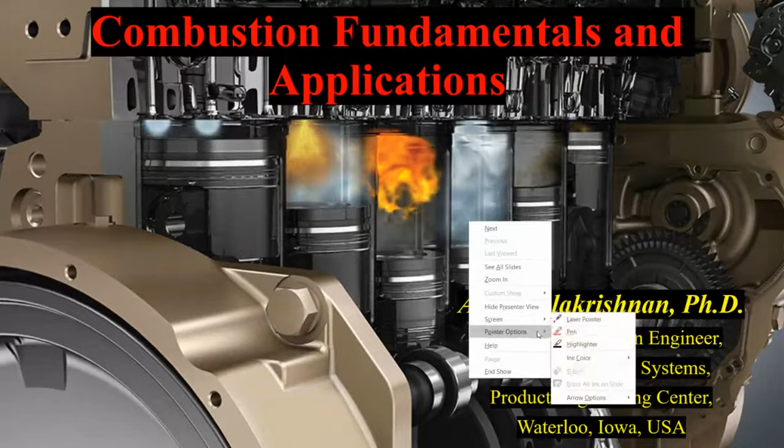So I'm going to talk primarily about what combustion is and its background, try to give you a perspective of its applications, and go a little bit into my PhD work on what I did in combustion. Just let me know if the internet disconnects or if you couldn't hear me through this presentation.

So this is our final year project. Dr. Singh was my thesis advisor there. It was a very amateur project, and that was the time when we were building our propulsion lab in Tagore Engineering College back in 2010. We started this as an amateur project, but then the way it got developed, we submitted our thesis to the 13th Asian Congress of Fluid Mechanics, and it got accepted.

With due respect to Dr. Dharmendra Singh Chand, I'm going to go through the presentation. I wanted to tell you all guys, whoever has the opportunity to work with Dr. Singh, you are very lucky. Now let me get into the topic for the day.

I'm going to talk briefly on what combustion means. I don't know if you guys have taken a course on this or are about to take it, but this is going to be a broad overview of what combustion is. I may not be able to cover everything, but I'll try to put in as much information as possible that I can cover within this 45 minute duration.

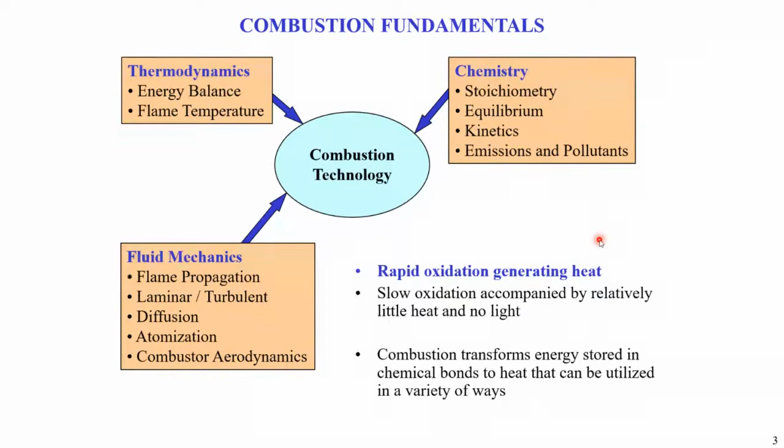In either case, combustion is basically a chemical reaction that transforms the energy stored in the chemical bonds to heat, in a variety of ways. So basically we harness the energy stored in the chemical bonds of any fuel by oxidizing it. The hydrogen and carbon are bonded by chemical bonds, so by breaking the bonds through oxidation, we are harnessing the chemical energy out of it. That's the basic definition of combustion.

I don't want to bore you guys with a lot of equations, but we need to go through this to get an idea of what I'm going to talk about in the later part of this presentation. Probably you would have learned in school or somewhere in chemistry class about stoichiometry. If you've never heard of stoichiometry, here's the definition: stoichiometry of hydrocarbon air combustion.

Stoichiometry is nothing but the exact amount of oxidizer that you need to burn a fuel. In this case, the oxidizer is air, but you can write the equation for just oxygen. This is the stoichiometric equation for a hydrocarbon fuel where X and Y stand for the number of carbon and hydrogen atoms. O2 plus 3.76 N2 is the chemical composition of air. When air is burnt with a hydrocarbon fuel, the first product of combustion is carbon dioxide, then water, and then nitrogen, because nitrogen is inert and doesn't react with anything. So in hydrocarbon air combustion, the primary products are carbon dioxide and water.

AF stoichiometry is nothing but air to fuel ratio stoichiometry. To burn a given amount of fuel, exactly how much air do you need? That is calculated using this formula. 4.76 is the molar basis, multiplied by the molecular weight of air over the molecular weight of fuel. I've put in an example calculation.

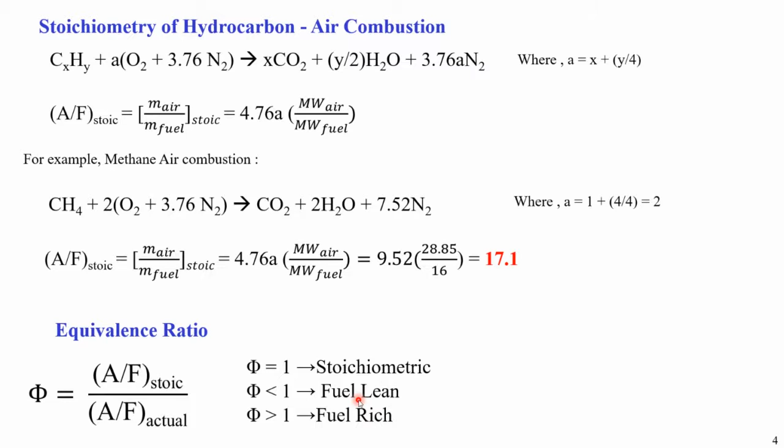So when we say fuel lean combustion, is there any practical application, or what does fuel lean combustion mean? We can say that diesel engine combustion is primarily a fuel lean combustion. A fuel rich combustion is somewhere where you have more fuel than the oxidizer present in the combustion system.

I'll try to keep this more interesting by not giving more equations, but trying to explain what this concept is. There is something called flammability limits when you talk about combustion. Whenever there is combustion of fuel, or whenever fuel is burning, there are certain favorable conditions required for it to combust properly.

In this left graph, you can see that the red color is the hydrocarbon. This is basically the relative percentage of hydrocarbon and air. Hydrocarbon is nothing but fuel. So we can see that every fuel requires a certain ratio of fuel and air in the combustion system for it to sustain a flame.

If the fuel is lower than the required range, it's going to extinguish. This is called the lower flammability limit, meaning the system doesn't have enough fuel for the given amount of air to combust properly. The same way, if the system has too much fuel and too little air beyond the flammability limit, this is called the upper flammability limit of the fuel.

I've given a few examples here. For diesel fuel, these percentages are a percentage by volume. If you have 100 liters of air, between 0.6 liter and 5.5 liters of fuel you can burn in that system. This is typically where diesel engine combustion takes place. The same way, for gasoline, between 1% and 7.6% of fuel. For methane, 5.3 to 15%, and for hydrogen it's a wider range, 4% to 75%.

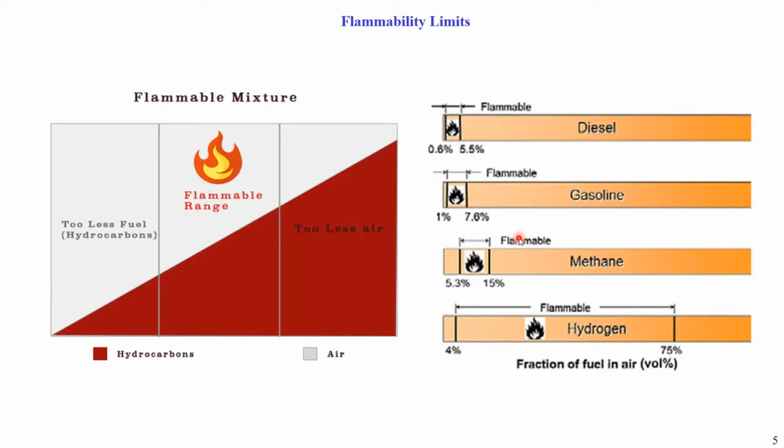This is something my advisor taught me in grad school - how to represent the whole combustion phenomena into a single mathematical equation. Probably some of you may have seen this equation. This is the classical Arrhenius equation. Probably you would have learned it in your chemistry class.

But when we learned this equation in chemistry class, we would have thought only about the rate of reaction. But in terms of combustion, we can see that the left hand side is basically determining the rate of reaction - meaning the rate of how the flame propagates in a combustion system. It is directly proportional to the molar concentration of the fuel, so how the fuel gets consumed. The more the concentration of fuel, the higher the rate of reaction will be.

This is called the frequency factor. This frequency factor is basically based on collision energy. Like when you read the definition of temperature, you know that temperature is basically a matter of randomness and the collision energy present in the system. So this parameter determines that collision in the system, and it's a function of pressure. With higher pressure, this number is going to go up.

And then Ea is the activation energy, R is the universal gas constant, and T is the temperature - and this is an exponential function. So for initiating a chemical reaction, you need a lot of activation energy because it's on the exponential side. You need to provide a lot of activation energy and temperature to initiate this reaction, and with higher fuel concentration and more pressure, you are going to burn the fuel.

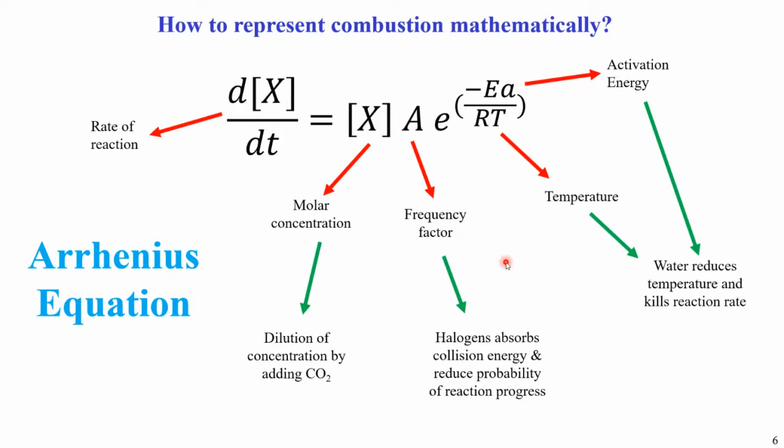This is what amazed me when I started learning about combustion, so I thought I would put that here.

Now we will go on to different combustion modes and flame types. I think I'm getting really slow here.

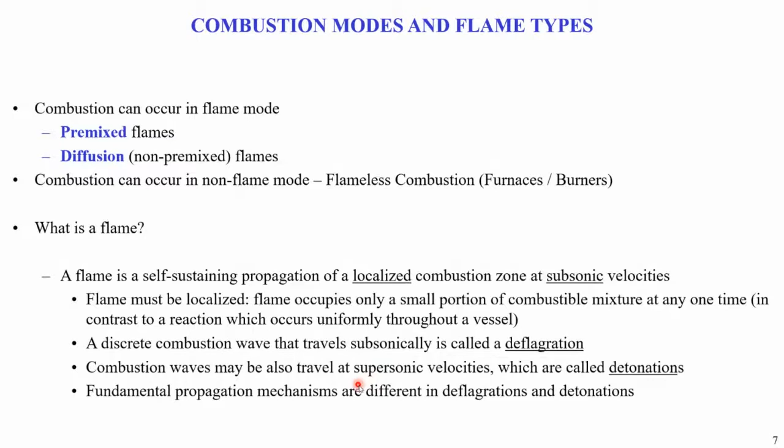Now I'm going to talk about the laminar premixed flame. Flames can be categorized into two types: premixed and non-premixed, with non-premixed also called diffusion. Similarly, they can be categorized as laminar and turbulent, similar to our fluid mechanics definitions. A laminar flame is one where the streamlines do not cross each other and it does not change with respect to time, whereas turbulent flames are complex, chaotic flames that follow all the definitions of turbulent flow.

So here we are going to talk about a laminar premixed flame. What does premixed stand for?

Premixed stands for the fuel and oxidizer, which is air or oxygen, mixed at the molecular level prior to the occurrence of the chemical reaction. So before the fuel and oxidizer meet at the combustion flame front, they mix with each other. So when it reaches the combustion flame front, they're already mixed.

So here you can see from this tube, this is called a Bunsen burner. I hope you've seen this before, it's in all the chemistry labs, where the premixed fuel... This is the diagrammatic representation of the Bunsen burner. The premixed fuel and air goes from here, and this is the premixed flame front, where when it reaches the flame front, the fuel and air is already mixed.

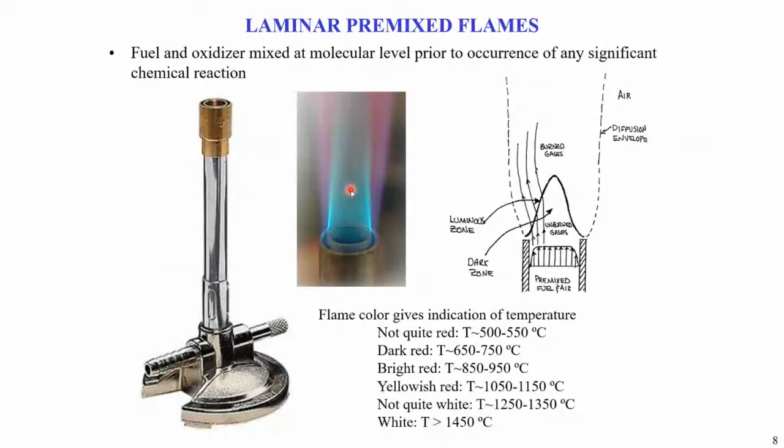With the flame color, we have different types. The flame color suggests different flame temperatures at each location. Red is the lowest, and when you see a white region of the flame, that's where the highest temperature is. Here's another laboratory picture showing the laminar premixed flame.

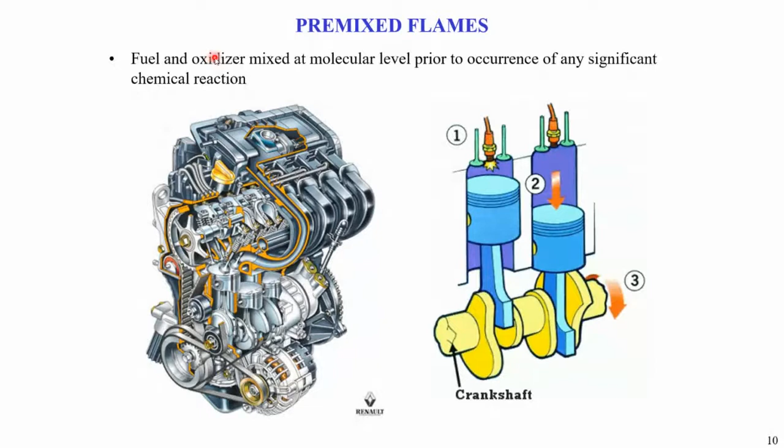So in reality, or in actual application, where do we have premixed flame? Think about our gasoline or petrol engine, like in your car, scooter, or motorbike, where you have a carburetor or fuel mixer. That's an example of premixed flame, because when it gets injected into your cylinder through the carburetor, the fuel and oxidizer have already been mixed there. So this is one example of premixed flame.

Here I'm going to talk about the application of flame mode and non-flame auto-ignition mode. In a spark ignition engine, when you have your charge injected and the spark is ignited, it starts a flame, and the flame propagates through the cylinder, pushing the piston down. This is how you normally combust fuel in a spark ignition engine.

But there's a special phenomenon called engine knock. Engine knock is basically a rattling sound you hear in one or more cylinders. It's because of a premature tendency to ignite. So before the spark could ignite the fuel, because of the high temperature and pressure present in the cylinder, the fuel auto-ignites itself.

That's when you've probably heard the term octane number. The octane number relates to branched fuel. Whenever you have a highly branched compound, it burns smoothly, so you'll have little knock. Heptane is unbranched, and that pretty much deals with knocking badly. So this is basically octane number of 0 and octane number of 100. When you go to the gas station, you'll see an octane number presented for the fuel. The higher the octane number, the lower the knock.

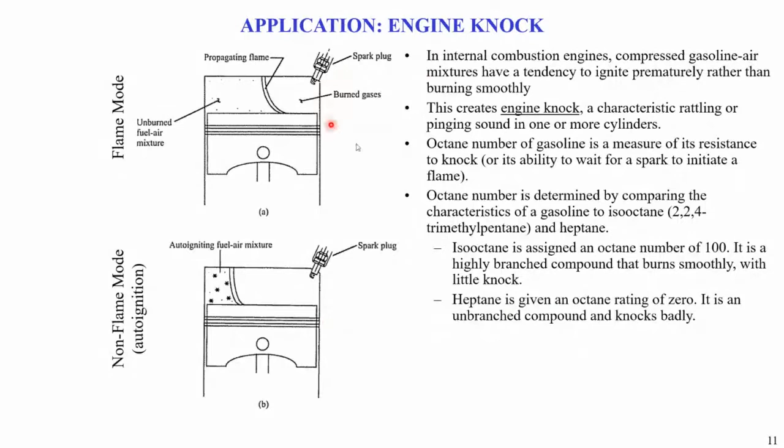So then let's go to the diffusion flame. This is the classical example of a diffusion flame, the candle flame. Here the reactants, the fuel and the oxidizer, are both separate until they meet at the combustion flame front. In a candle flame, when you burn the candle, the wax gets vaporized, and that vapor meets with the oxidizer present in the air at the combustion flame front.

So this is how the diffusion flame occurs. Here you can see in the burner, the fuel alone is coming, and the air comes from the atmosphere, meeting at the flame front. These are the different flame fronts of the combustion flame, and here you can see a full range of equivalence ratio throughout the flame. I defined this equivalence ratio where a ratio greater than 1 is a fuel-rich flame, and less than 1 is a fuel-lean flame. Whereas in a diffusion flame, the equivalence ratio is typically infinite, because the denominator goes to 0 for a diffusion flame. So this is the classical diffusion flame example.

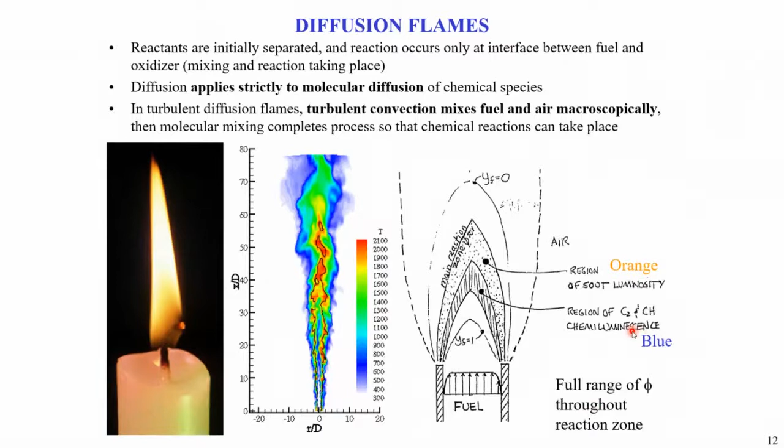So this is just for some curiosity. When you have a diffusion flame on Earth, like a candle flame, it's pretty much going to look like this. But if you have it in space, it's going to look like this - it's called microgravity combustion. Why does this happen? Because of the gravitational force present on Earth. The gravity is pulling down the flame, and because of the buoyancy effect of the gravitational pull, your flame always tends to go up. This is the reason even if you hold your candle flat or pointing downward, your flame always points up. The reason is the presence of gravitational force and the gravitational pull.

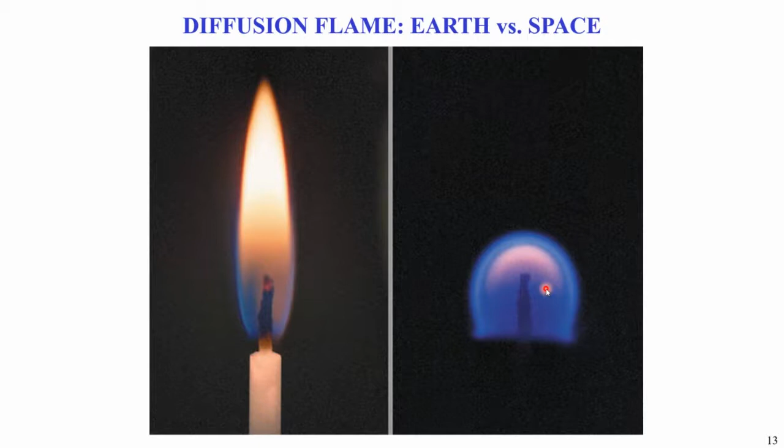The buoyancy is basically the occurrence of the gravitational force. Whereas in space, that doesn't occur. Even though it's still pointing upwards, because there is microgravity present in space, it won't extend like this.

So an example of diffusion flame: I talked about the premixed flame, and the real-time example for that is a gasoline engine. The same way, for a diffusion flame, the classical real-time example is a diesel engine combustion. I hope you all know the difference between a spark ignition engine and a compression ignition engine.

In a spark ignition engine, you inject the charge, which is the fuel-air mixture, which is then combusted by introducing a spark through the spark plug. Whereas in a diesel engine combustion, you do not have a spark plug because you induce combustion by pressurizing the fuel beyond its auto-ignition temperature. So when it reaches the ignition temperature, the fuel combusts by itself because of the compression. That's the reason diesel engines have a higher compression ratio.

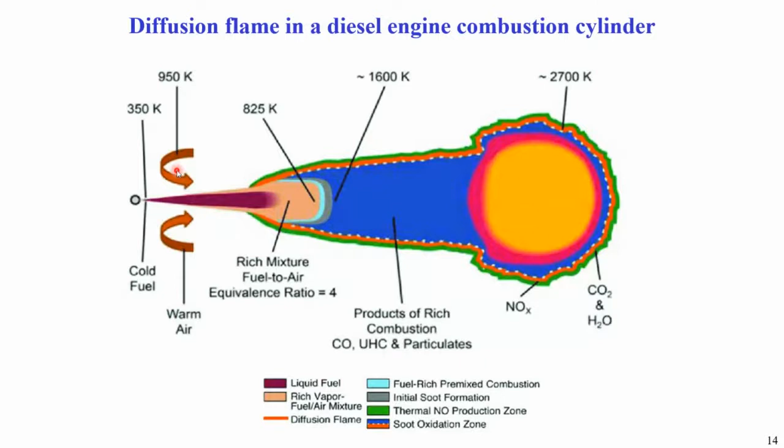So in this case, when the fuel is injected into the cylinder, because of compression you have hot air, and the mixing of those occurs here. So this is the classical diffusion flame. But the cylinder is completely filled with air, so as it propagates into the air, it forms different regions of flame: rich combustion and then lean combustion. These are the different zones present in a diesel flame. This is the theoretical schematic diagram of how a diesel engine flame looks like.

Now let's go back to our Bunsen burner example. Here you can see this blue line, the blue flame, is the premix flame, because the fuel and air is coming through the tube, since it's premixed, right? This is the premix flame where the fuel and air is already mixed before entering the combustion zone.

Whereas you also see a secondary flame, like you can see there are two flames that are encompassed each other. There is a secondary flame. This is a diffusion flame.

The reason for this is when the fuel and air comes through, part of the fuel gets oxidized here, and then because of the velocity, some fuel escapes the premixed flame zone and tries to go to the atmosphere. That's when the air entering from the atmosphere tries to burn that fuel, and because of that you will have fuel coming from this end and air coming from this end, and they meet at the combustion flame front, which is the definition of a diffusion flame. So in a Bunsen burner, we actually have both a premixed flame and a diffusion flame.

Now let's try to answer a few questions. What determines the shape of this flame? The answer is the velocity.

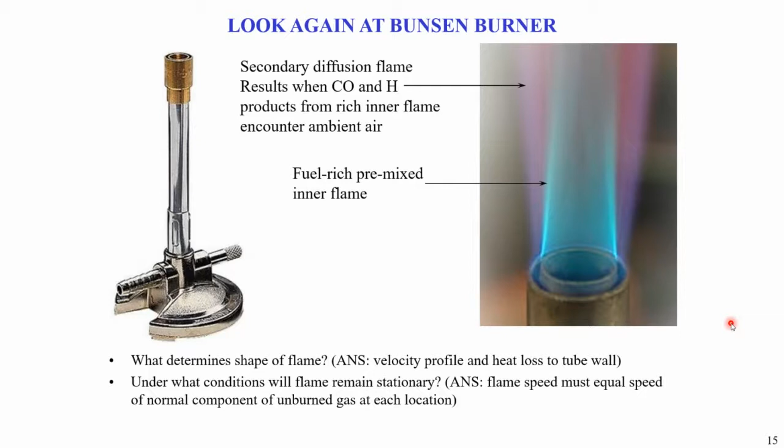I'm going to explain this through a video, but the flame on this burner can only be sustained if the unburned reactant velocity coming through the tube is balanced by the burning velocity of the flame. If that doesn't occur, there will be two other conditions, called flame blow-off versus flashback.

So when we have a stable flame, it means the incoming velocity from the burner tube equals the burning velocity. This flame is going to sit on this burner and burn as long as the fuel, or fuel-air mixture, is coming.

Whereas blow-off occurs when the reactant velocity is higher than the burning velocity. The burning velocity is a tangential component that acts like this, whereas the incoming velocity comes like this. So when the reactant velocity is higher than the burning velocity, it blows off the flame. The flame just goes off.

Whereas there is another thing called flashback. When the burning velocity is higher than the incoming velocity, the flame tries to get inside the burner. Now let me play this video and show that.

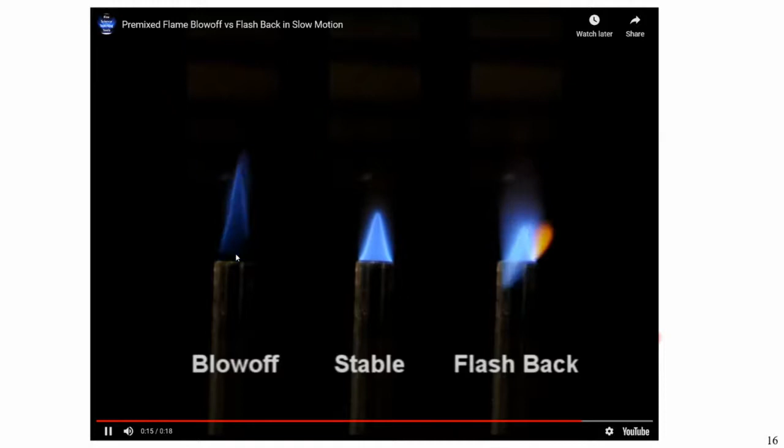Okay, that was quick. Now we're going to see the slow motion, where we can look at the blow off. You can see how the flame goes up, right? The same way, when we look at the flashback, the flame goes back.

Both of these are undesirable conditions, because let's talk in application. We don't want blow off to occur anytime during a combustor's operation. Take an aircraft engine, we don't want the flame to blow off when the engine is running mid-air. The same way, in any combustion application, we don't want the flame to go off, because when the flame goes off, the fuel is still being injected out, and that creates a hazardous condition.

The flashback is another condition where we don't want the flame to go back and burn the fuel inside, because the fuel is coming out of the fuel tank, and we don't want the flame to travel back into the fuel tank. That is the reason we choose a fuel that has a favorable flammability limit for that particular application.

To prevent flashback, we have something called a flame arrestor. The flame arrestor is nothing but a wire mesh that we put somewhere upstream of the burner. When the flame tries to cross that, it basically quenches the flame. When I say quench, it means it brings down the temperature of the flame so that it can no longer sustain itself. So these are some critical concepts of different types of flame.

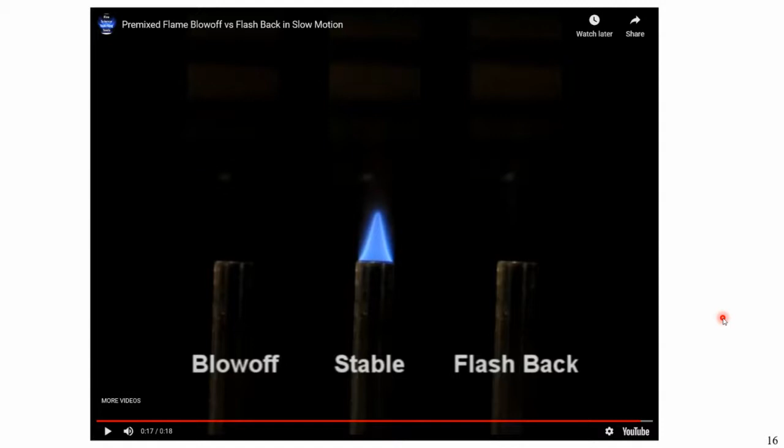Okay, now let's get into something called emissions and pollutants.

This is where all the combustion engineers and propulsion system designers work on, because we need to be emission compliant to get our products approved from these emission regulations.

For India, it is called Bharat Stage. We have different stages of combustion regulation that we need to meet to sell the products. For the US, it's called FAA regulation or EPA regulation, with something called tier 3, tier 4, and so on. For the European Union, it's called EU regulation. So every country has its own regulation. For India, it's called Bharat Stage.

We are currently running on Bharat Stage 4, and probably in the news you would have heard about Bharat Stage 6 vehicles, stage 5 vehicles. Each of those stages represents more stringent regulations for each of these pollutants, pretty much unburned hydrocarbon, nitrogen oxides, carbon monoxide, sulfur oxides, and so on. So we have stringent emission regulations that we need to follow to protect the environment.

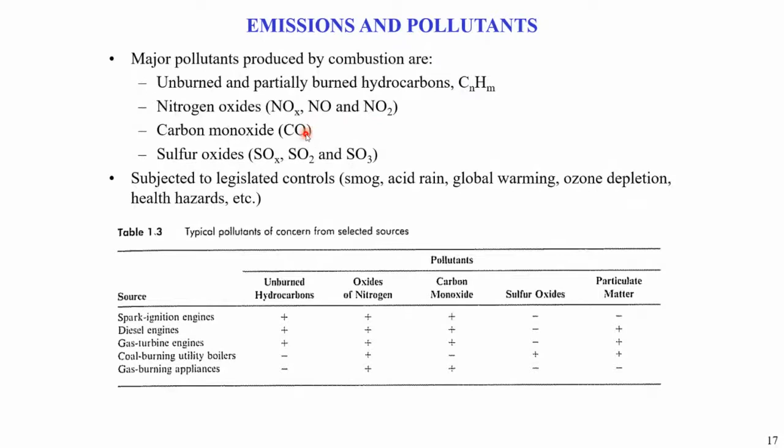My entire PhD work, and even a huge portion of my current job role, focuses on nitric oxide pollution. In my PhD work, I dedicated my time to understanding how nitric oxide is emitted or produced in a combustion environment. In my current role, I develop after-treatment catalysts and also try to calibrate the engine so it produces a reasonable amount of NOx that we can regulate through after-treatment systems.

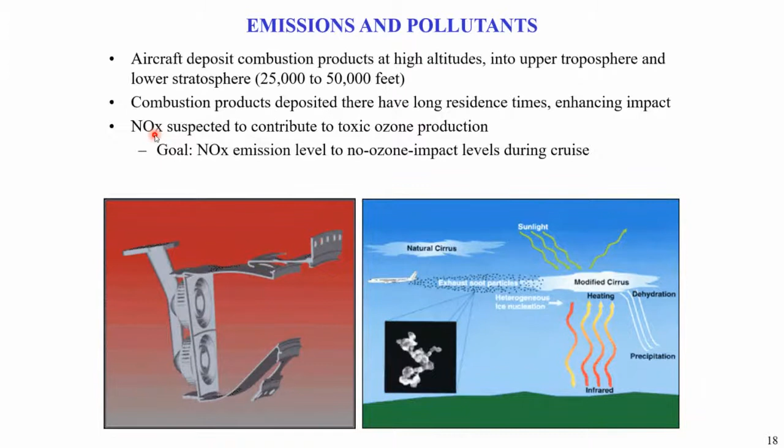With that background of combustion, I'm going to talk a little bit about my PhD topic. At the University of Oklahoma Combustion Lab, we do combustion research on biofuel, not only diesel and jet fuel combustion. We also did biofuel combustion research, trying to find vegetable-based fuels like canola oil, soybean oil, and then use those as biodiesel based on an esterification process, called transesterification.

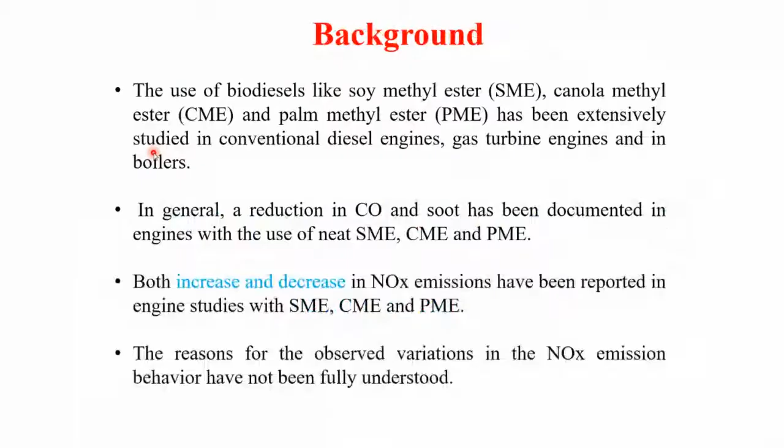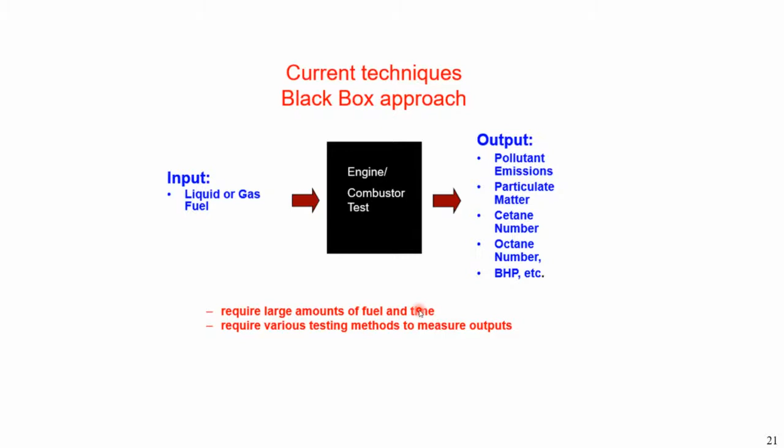Since I'm reaching the time limit, I'll just give a gist of my research. In every engine research work, they put the fuel in, test the engine, and measure all the pollutants out. We developed a system where we don't want to burn a lot of fuel, because in testing development, developing fuel is very expensive. So we want to use little time and little testing, and reduce the number of tests needed to characterize the combustion.

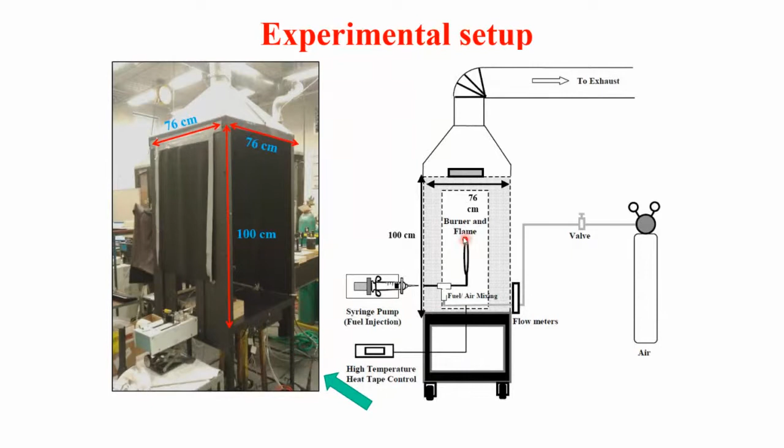So for that, we developed this combustion system where we pre-vaporize the fuel and inject it through the system to burn a premixed flame. By pre-vaporizing the fuel, we remove fluid mechanics parameters like atomization and spray evaporization, so that we can only study the contribution of chemistry to the pollutant formation.

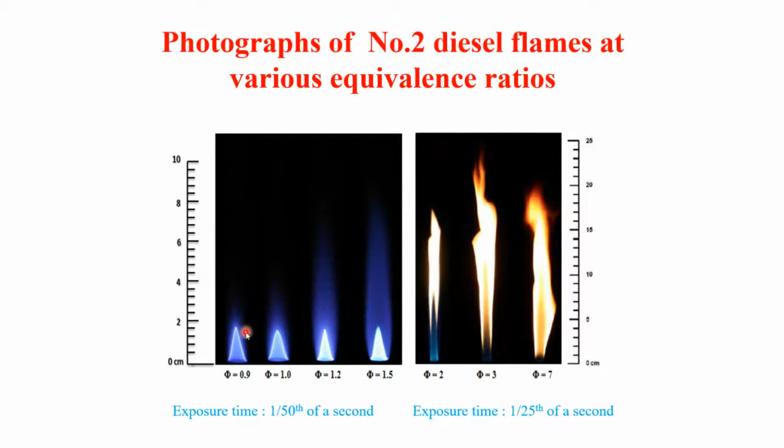I'm going to just skim through the slides. This is a diesel fuel flame under different equivalence ratios, and this is a palm methyl ester flame under different equivalence ratios, where you can see at fuel-rich conditions it's still burning blue flame, which is good because it's emitting less soot.

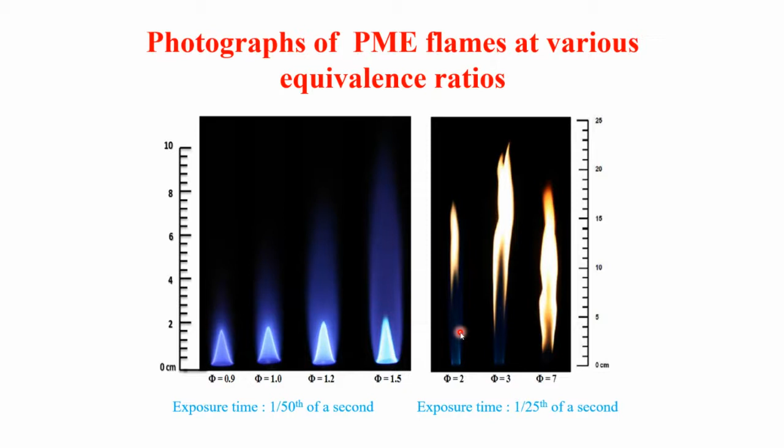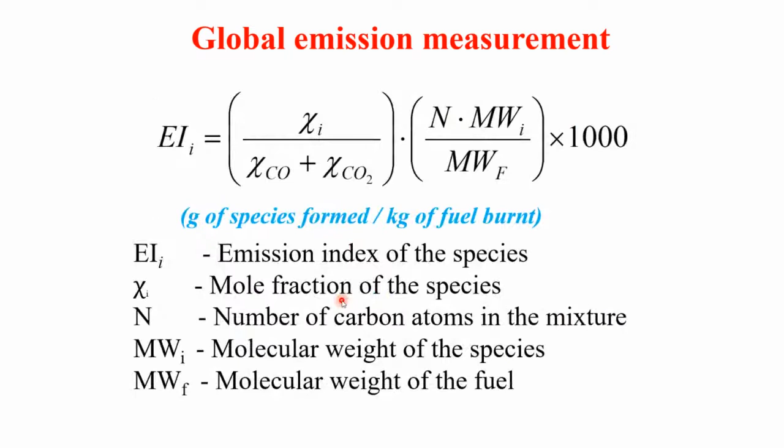And there is something called global emission measurement, where we put the probe to understand the pollutant emissions using this formula, and then a flame radiation measurement to determine how much heat is radiated through the flame.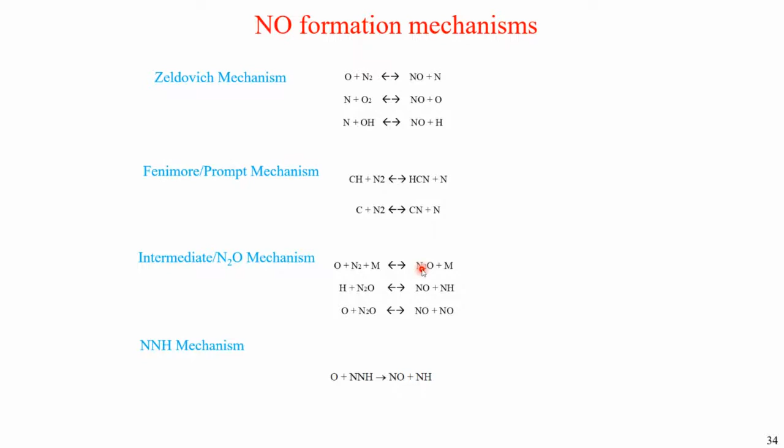This is to understand the temperature and the species, and this is the mechanism through which nitric oxide forms inside a flame. So I studied this mechanism to understand, in different fuels and different conditions, how each of these reactions occurs.

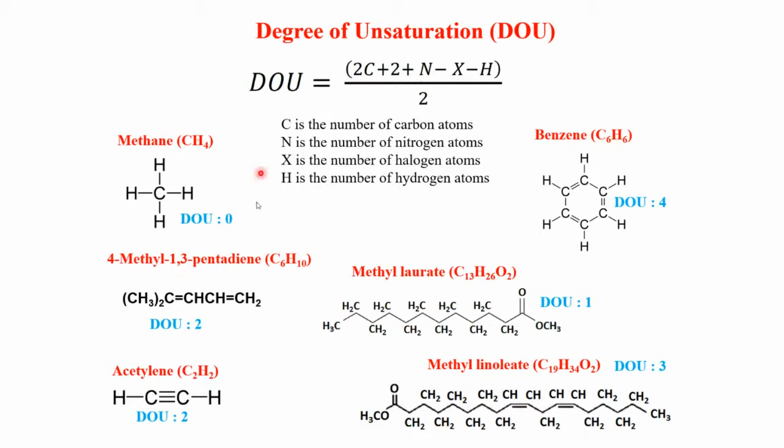And I developed, in my PhD work, a formula based on carbon, based on the fuel molecular formula. So based on the number of carbon, hydrogen, nitrogen and halogen present in the fuel, I tried to develop a formula where I put a number for each fuel and try to understand its correlation with the emission index.

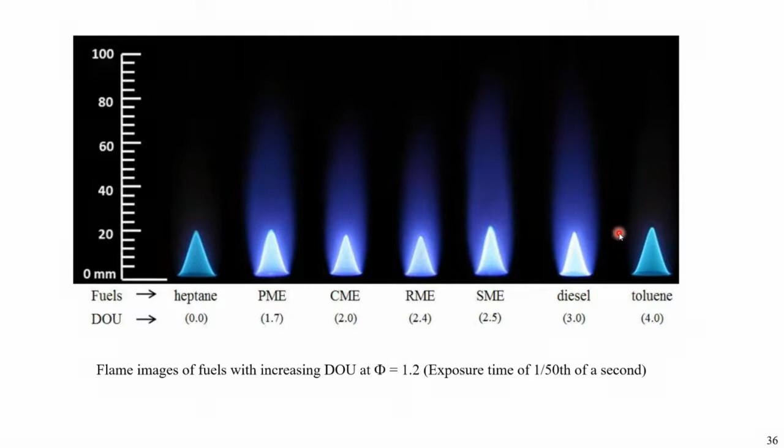This is for different degrees of unsaturation value, showing how the flame appears visually. I have a lot of experimental results which unfortunately I could not present all of in today's meeting, but this is just an overview of what I did.

It took me some time to put together this slide because I wanted to digest all the information from my 5 years of PhD work into a single equation. So this is one such equation.

There are a few more equations like this in my PhD dissertation, but this one gives a direct relationship between DOU, which is a fuel-based chemistry value, and Phi, the equivalence ratio, which is the combustor operation parameter. By directly linking the fuel parameter and the combustion parameter, I am predicting the amount of nitric oxide that is going to be produced in a given combustion environment.

This is an empirical formula based on certain conditions. This developed correlation is useful in predicting nitric oxide emissions before producing a particular biodiesel fuel for a given combustion environment. Basically this value is a limitation based on emission regulations. So by knowing this number, we can design a combustion system and engineer a fuel to achieve that emission target.

This is for a particular family of fuels, but I have equations like this for biodiesel blends, petroleum fuels, and biofuels. This correlation was found to be a convenient tool for developing fuel. So this research work is primarily based on new fuel development, which we call engineering the fuel — we can manipulate the fuel to be used in a particular combustion environment while still meeting the emission target.

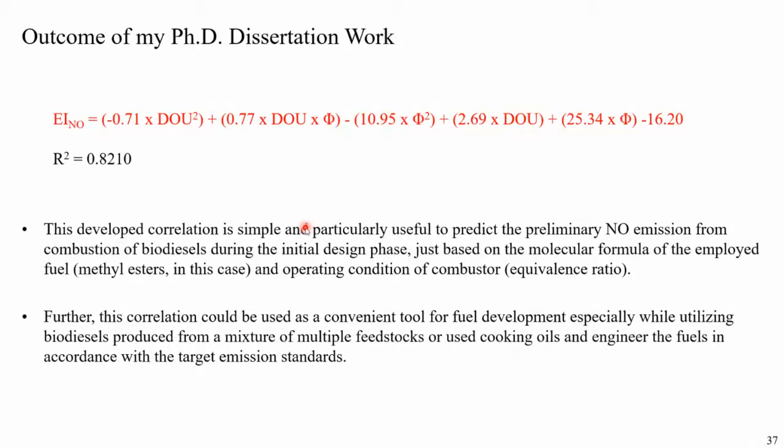Sorry to skip through all these slides. This was the abstract of my work, and now, in conclusion, this is my conclusion slide.

So it's a very high-potential, environment-friendly industry. When I say environment friendly, engineers like us who get into this field are the ones who develop much more efficient combustion systems while still meeting all the environmental pollution regulations.

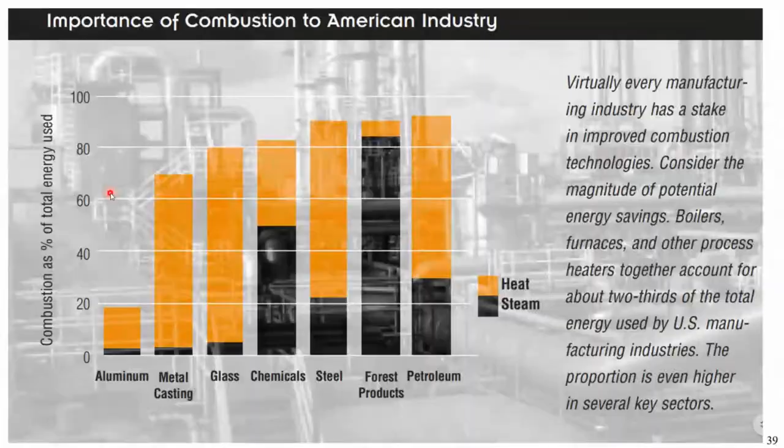So it's time for questions. I know I have jumped through a lot of slides. Let me get into the questions — I think I have some questions here.

Yes sir, you got one question from one of our students: could you please give a brief on current trends, challenges, and limitations on aircraft and rocket engine combustion? How far are we in the future to achieve progress there?

There are a lot of system designs, but because of the thermodynamic concept called entropy, we lose a lot of energy to the environment when we burn a fuel. So there is still a lot of scope for that to improve.